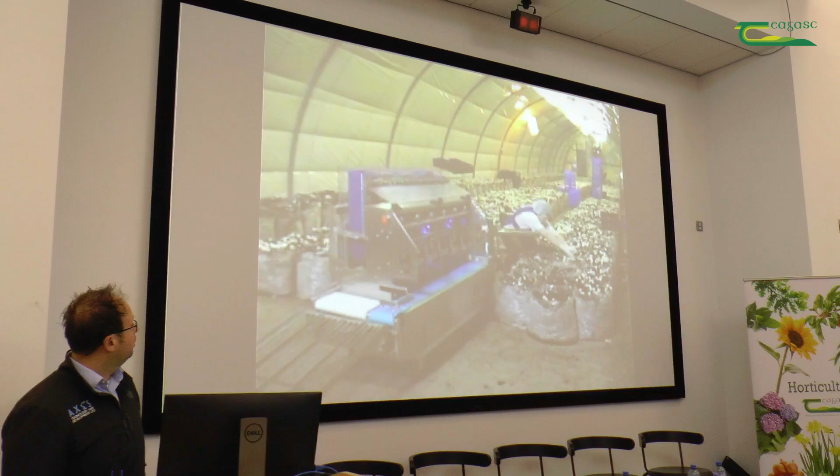After looking at different conveyor systems, this is really where it all started. I'll show you a short clip taken in 1996 in some of our mushroom houses at our home in Guildford. Please excuse the old quality, but this is taken in '96 - it's just bags on the floor in our very first iteration of our mobile processing unit.

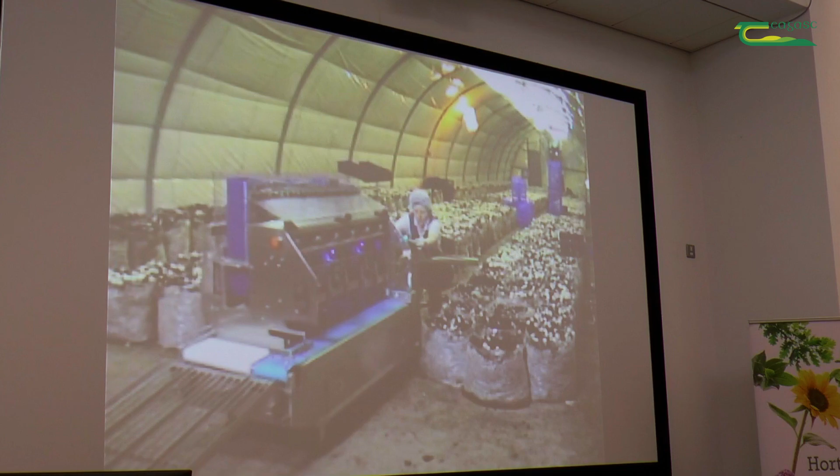This was our initial prototype, but by the early 2000s our mobile processing unit was production ready, and we sold about 24 of them by 2004, locally in Ireland and some in the UK.

At this stage, with the current typical infrastructures here in Ireland and also in tray farms, there's been a renewed interest in this machine because of the flexibility it has and a lower cost alternative where you don't need to provide modifications on your farm or make changes to your farm room layout. We're happy to announce we're actually in the final stages of redeveloping this machine and incorporating some new technology into it, and we've taken some pre-order sales for it at this stage also.

The redeveloped machine will fundamentally be similar, but it'll work on 6 stages high of shelving. It has an inbuilt tracking system which follows the shelving. Once the operator selects whether you're going forward or reverse with your speed, it follows your Dutch shelving in the room. It works similar to the video clip you're about to see here.

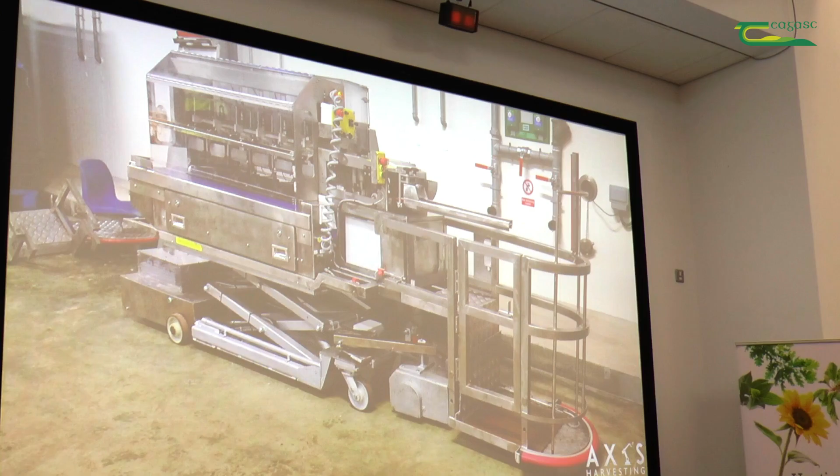In relation to our harvesting conveyor system, which some of you are more familiar with, the core of the integrated harvesting solution is the conveyor itself, which is filled with numerous rollers. The conveyor is built around Dutch shelving, and the harvester, or in future the robot, can place the mushrooms onto the mushroom holding fingers, and the harvesting conveyor transports them to our mushroom processing unit at the front of the room.

This mushroom processing unit grades mushrooms into 6 different sizes, and it can be either 6 same punnets or 6 different size punnets at any one time. The vacuum system removes the stalks automatically, and these are disposed in large crates which are emptied at the end of the day. The washer system washes and sanitizes the mushroom holding fingers, and this can also be done between shifts if you're running a two-shift system.

Regarding harvesting speed, we set the pre-requirement that our system would have to provide harvesters with the ability of harvesting at a minimum 2.5 times faster than conventional harvesting methods. Typically, a comfortable harvesting piece rate of 135 pieces per minute is achieved with 2 harvesters on one mushroom harvesting conveyor. The speed can be easily changed to incorporate either faster harvesters or to add extra personnel onto the conveyor.

We can also maximise stalk length to optimise your yields. Real-time productivity and data output is captured, and we're currently in the latter stages of producing our SCADA system, which will allow the harvesters to clock in and out and provide all the data to your management team live, which also could be used to automatically compare your daily sales forecast with real-time production.

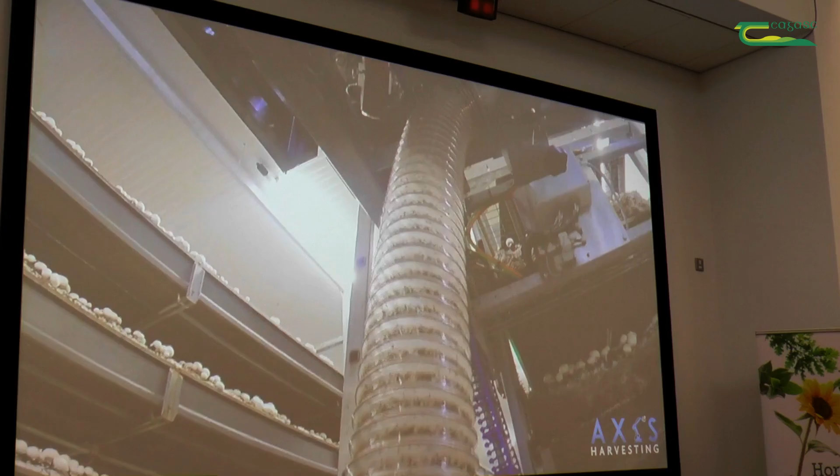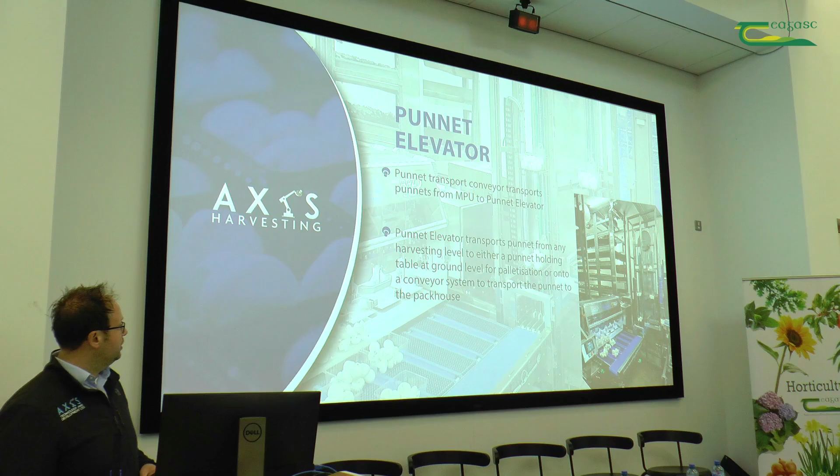After considerable research and development, we can now announce that we finally finished our punnet elevator. This add-on brings a new punnet transport conveyor which transports the punnets from the current MPU to the punnet elevator. The developed punnet elevator transports your complete punnet from any harvesting level to either ground level where it can be palletised and packed, or put onto a conveyor to take to your pack house, as the next video shows.